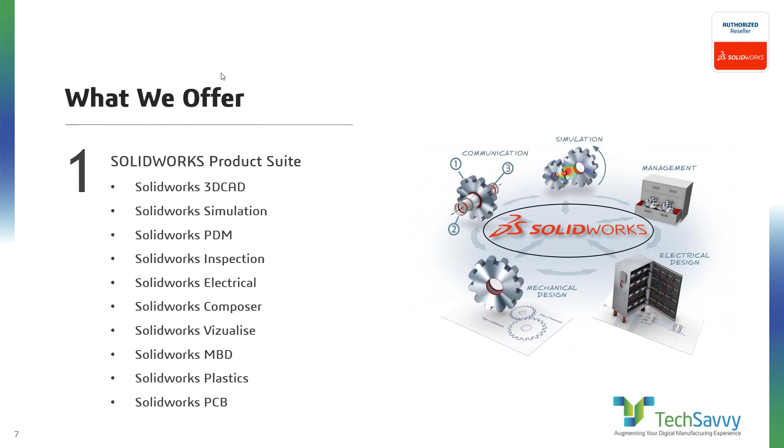Now what we offer. This is the complete product suite we offer. We have solutions from mechanical design to electrical design to electronics design, like SolidWorks PCB layout designer, and we also have solutions in technical documentation, data management, and design validation with our simulation products like structural simulation, flow simulation, and different analysis products.

Apart from this, we also offer design engineering services like 2D to 3D conversion, tool design, reverse engineering, data migration, FEA, CFD simulation services, design automation, etc. Apart from these, we also serve as a training and support provider in North India for SolidWorks products.

Now, our presence. We are present in North India with headquarters in Noida. We also have dedicated offices at different locations like New Delhi, Gurgaon, and Jaipur.

Today I am going to complete a training session on productivity tools part 2, as we are running a free SolidWorks training series called the Mastering series, covering sessions on different modules inside SolidWorks. This productivity tools topic has been planned with 3 sessions, one of which is already done, and the second part I am going to show you today.

This is the whole agenda of productivity tools, and today I am going to cover the agenda for day 2. So today I will cover SolidWorks utilities, toolbox utilities, and the toolbox library.

Let's start with SolidWorks utilities. These are some utility tools with which we can make manual tasks automatic, like model comparison, drawing comparison, drafting standard checking, analysis of thickness variations, dummy part creation for analysis or top-level assembly, etc. With help of these tools we can perform these tasks with just a few clicks within SolidWorks. Even some of the utilities are able to generate reports. These are some features that come under the category of SolidWorks utilities.

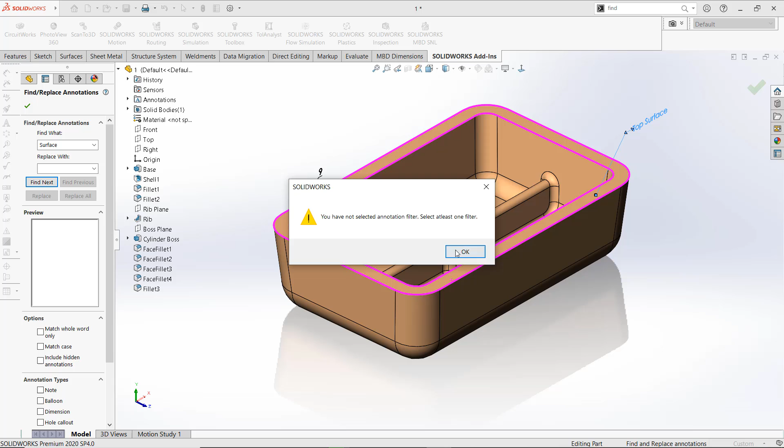Quickly run find and replace annotation. I am going to type surface, and now if I press find next, you'll see annotation filter has not been selected. So this is the time to select the annotation filter. I have selected surface finish, and then find next. Replace this surface spelling with face.

We can replace multiple annotations in a single shot. Now the next is find N and replace with N1.

So these are some tasks you can simply perform with utility tools. The next is find and modify feature. What will find and modify feature do for us? It is used to search and modify features individually or in a group.

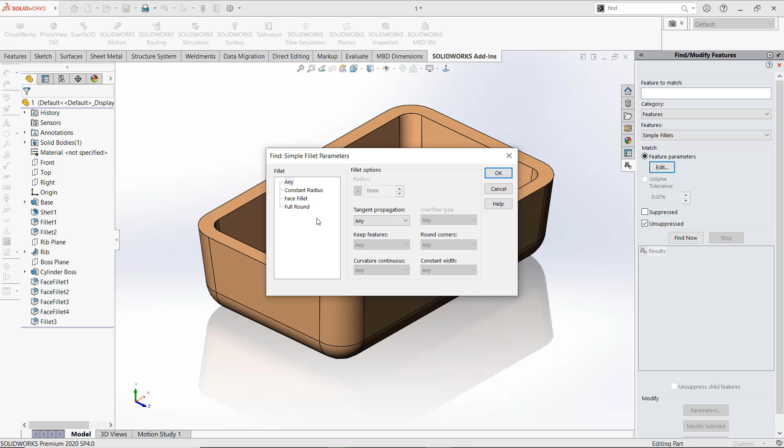Just select a feature in the category and select simple fillet. I can edit parameters to define some range. Find now. I can also define which types of features will be searched, like unsuppressed or suppressed. Now this is the time to observe parameters. This radius value is 6. I am going to change this.

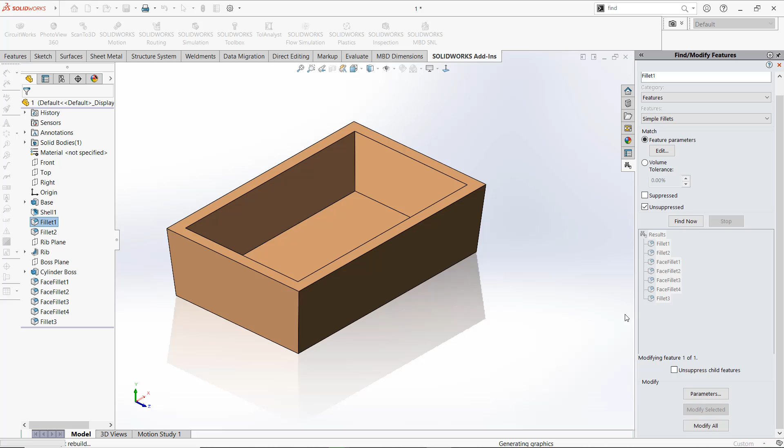I can also select multiple features and change parameters simultaneously for them. Now I am going to change this from 6 to 5, and if I have selected multiple features simultaneously and changed parameters for them, I can use modify all. This time I will proceed with modify selected, and the feature dimension is modified.

The second one is 12 mm. This is the time to change this to 10 mm and modify.

Okay, so this is how find and modify feature will work for us. The next is simplify. Simplify will create a simplified configuration for use in a top level assembly or for analysis purposes. Let's see how.

Select filter as per your requirement, then simplification factor, then find. Now you can see, as per the simplification factor 0.5, 3 fillets has been selected.

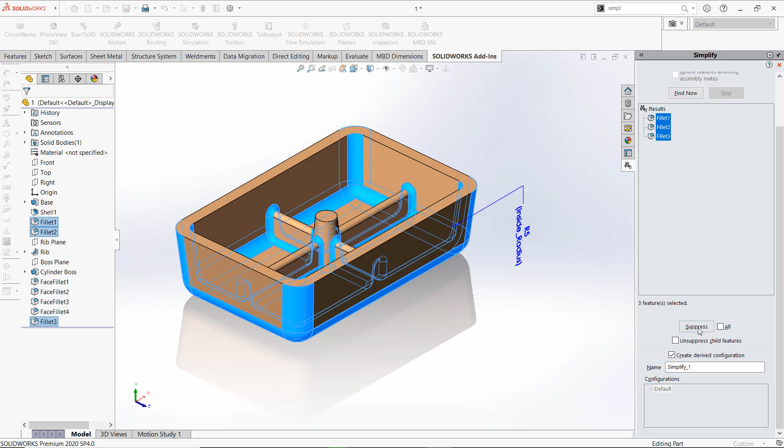Now I am going to suppress these fillets. When I suppress these fillets, simplify command will create a new derived configuration with suppressed state of these 3 fillets. Derived configuration. Now quickly switch to the parent configuration and quickly move to the slide.

The next is power select. What is power select doing? Power select will enable us to select multiple features in a single click. Like we can filter the parameters in different ways, like edge convexity, edge angle, face color, feature type.

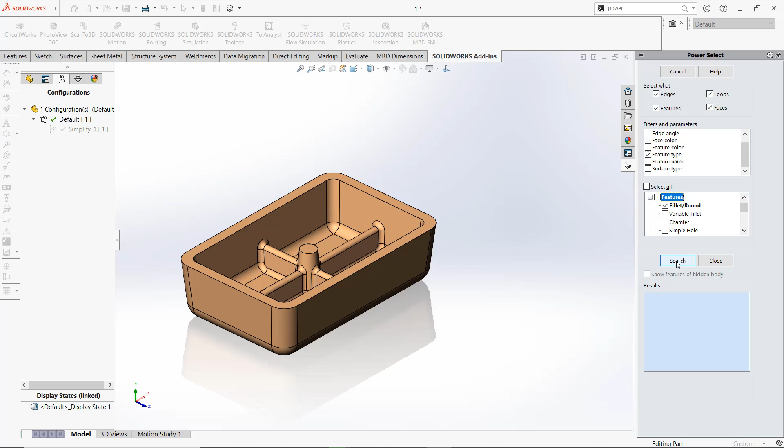I am going to proceed with a very simple filter, feature type, and in feature type I will select fillet, and search. So these are the fillets selected by power select. Now close power select and we can simply suppress all selected features in a single click. So this is how power select will work for us.

Now the next is thickness analysis. What will thickness analysis do for us? Thickness analysis will verify the thickness variation along the whole part against the thickness range or thickness target provided by us.

First, I am proceeding with thin region thickness analysis, and with default values inserted, just click calculate, and this is the time SolidWorks will perform a thickness analysis for me.

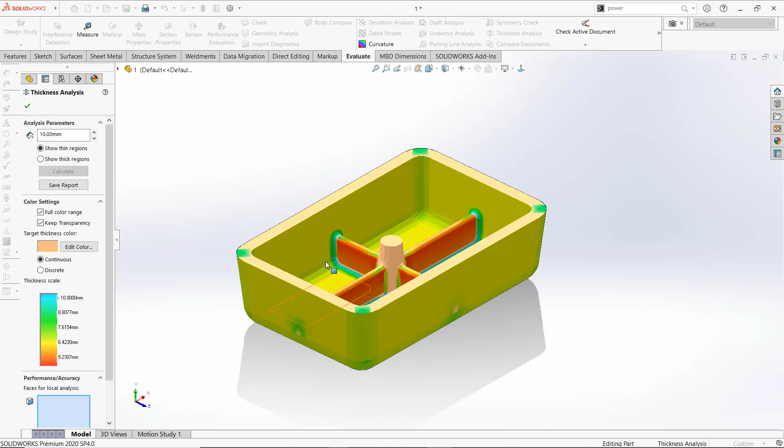Okay, now you can see here, this is the range chart. Change the value to 10, then recalculate. Now you can see the range chart is defined here and the model is color coded as per the range chart.

You can see as this rib is drafted, that's why when you hover your mouse, the thickness is varying at different height. Okay, we can save this report, folder name...

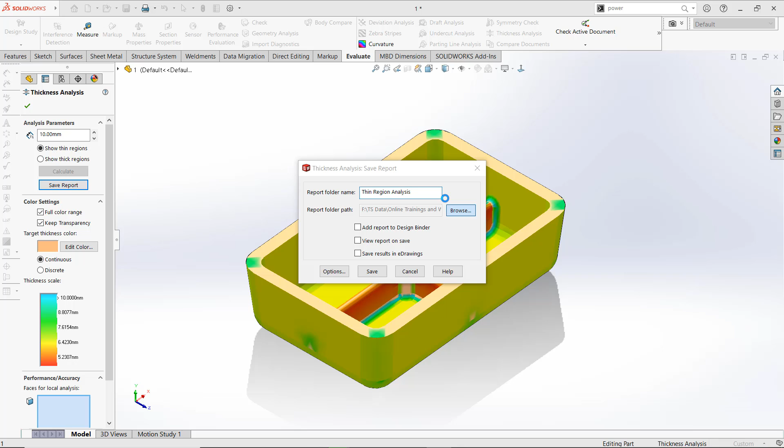Thin region analysis, and I am going to save this to the location. I want to show you that you can set your location as per your suitability. Now save it.

On the same location, we will find the reports. Reports has been created. I can view these reports by double clicking on them, as these are HTML files or HTML pages. Report is opening. Okay, so you will find an interactive report generated by SolidWorks for thickness analysis of thin regions.

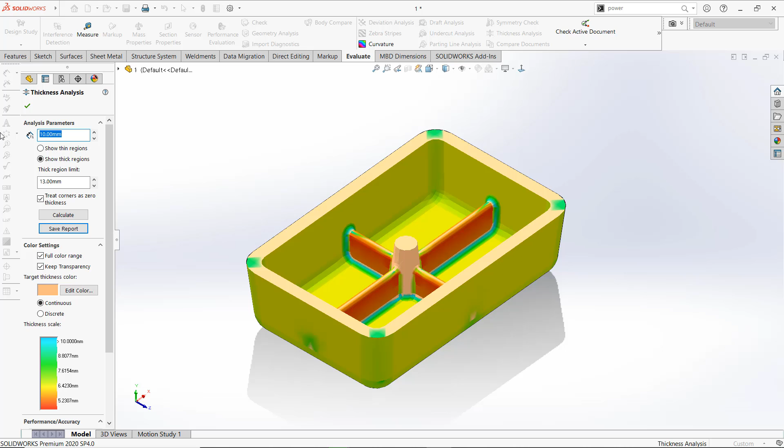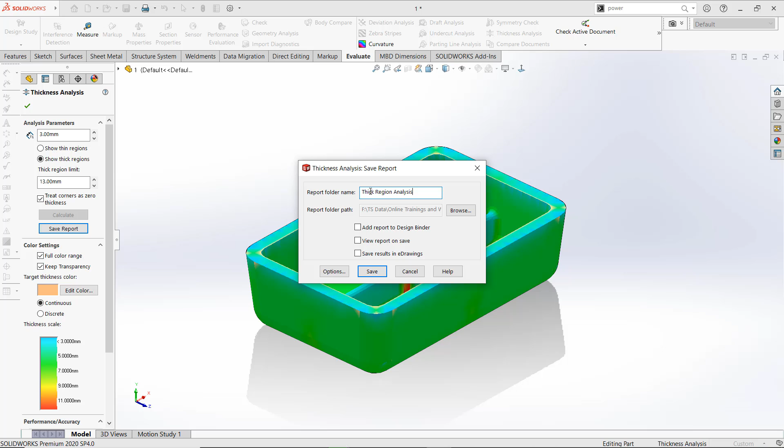Now this is the time to check thick regions. Provide minimum thickness up to some maximum value, and calculate the region that lies under this range. This is the range color chart, and the model is divided into different colors as per the color range chart for thickness. We can also save this report as thick region analysis, and save this.

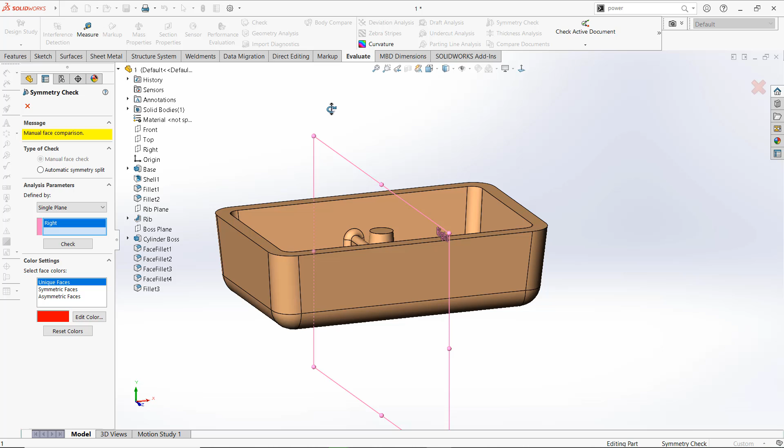Now the next command is symmetry check. Quickly run symmetry check. What will symmetry check do for us? Symmetry check will check the model against a provided planar face or plane for symmetry. Just click on check.

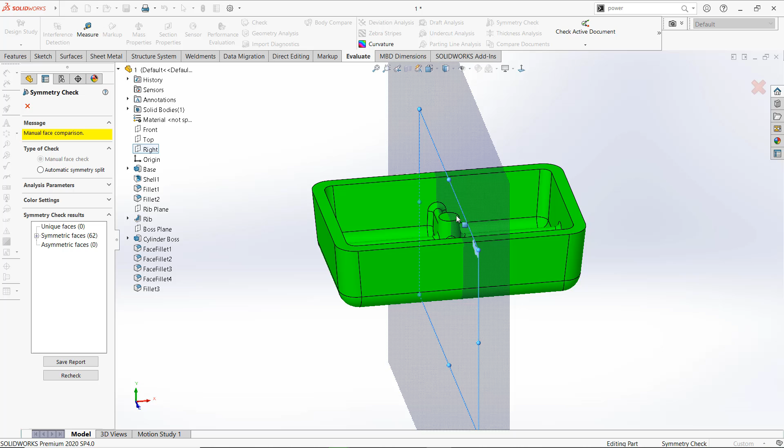Part symmetry check. What are the symmetry check results showing? Part is symmetric about the right plane. Now this is the time to check our part. Part is symmetric about the selected plane. Okay, you will see in the result area there is no unique face, there is no asymmetric face. All faces lie under the symmetric face.

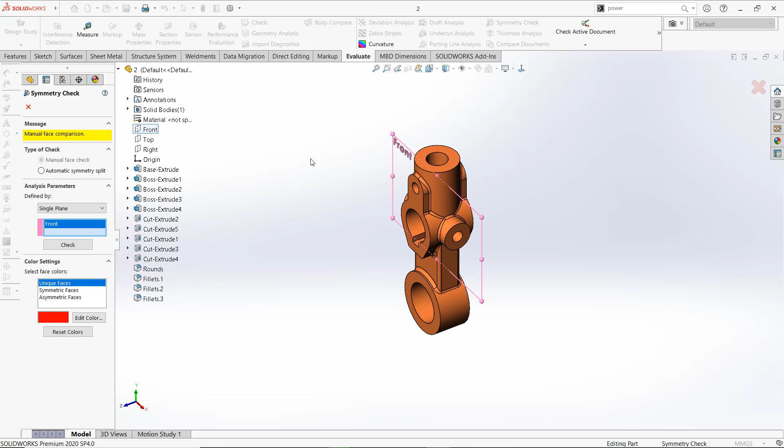Let me show you some different results. I am going to run symmetry check on this model with the front plane. Part is symmetric about the selected plane.

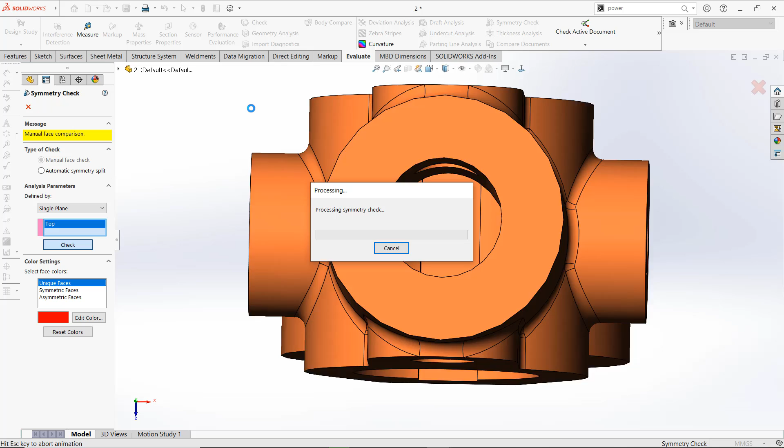Now I am going to select a different plane, like the top plane. And now we will see what results will be calculated by the symmetry check command. You can see there are some unique faces, some different asymmetric faces found in this model with respect to the top plane. That's how the symmetry check command works. Quickly move to the slide.

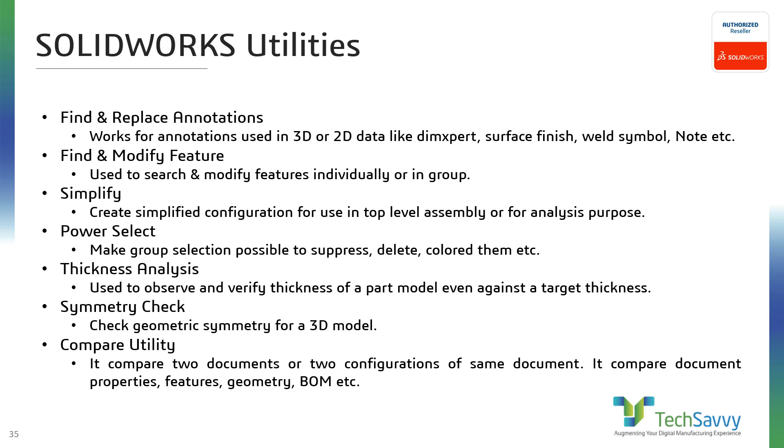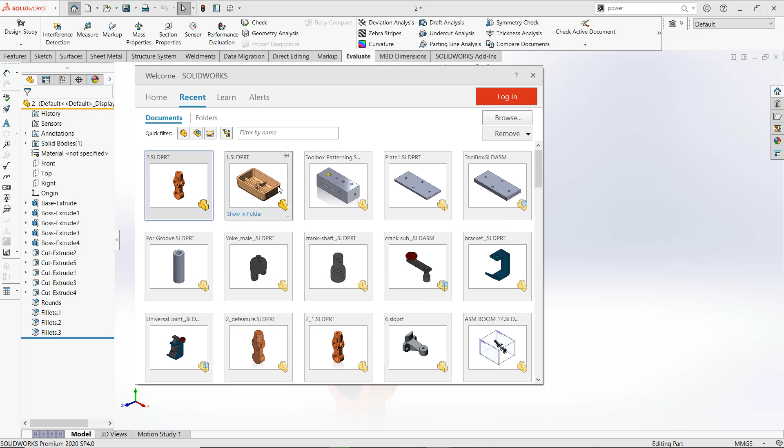Now next is compare utility. Let me show you first. We can run compare utility on similar types of models with some changes. Let me open a different version of this part. Now run compare document for 2 and 2.1. I can select for which parameter I can run compare utility, like document properties, features, geometry.

If I am comparing an assembly, then I can compare bill of material also. Now this is the time to run the comparison.

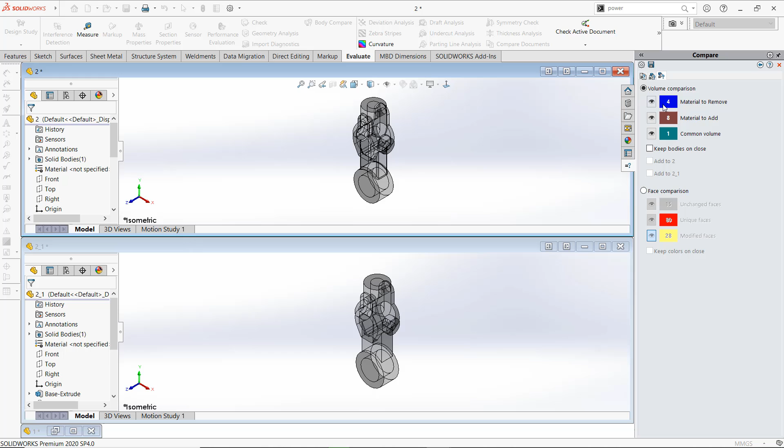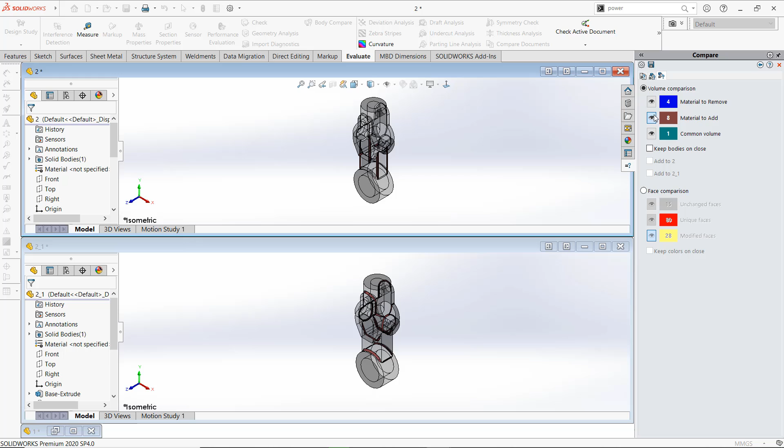These are comparison results for document properties. For features, you can see for geometry, material to remove. This material is to remove this material in this model to make both models identical. Material to add - if you don't proceed with material removal, then you can add materials. And what is the common volume for both models?

So this is the compare document. We can run comparison for both assembly and drawing documents.

Different parameters against which we can check our model, like short edges - we can define range, small faces - we can define range, sliver faces - we can define range. Sliver faces are the faces with very high aspect ratio. Knife edges are the edges where two adjacent faces have an acute angle. Knife vertex are the vertices where two adjacent edges have an acute angle.

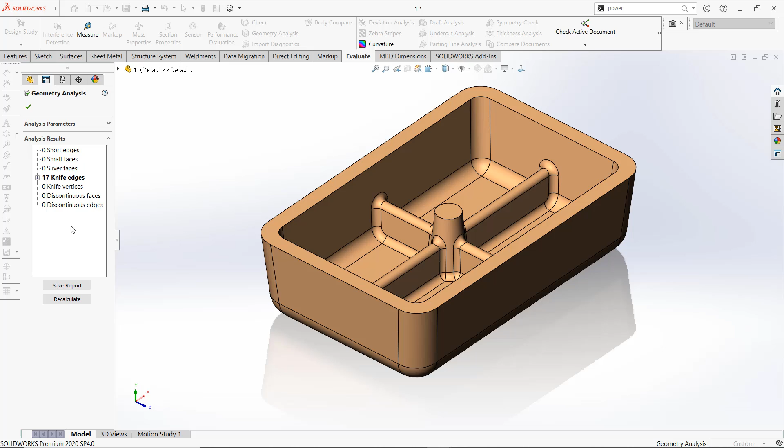We can provide values as per our requirement and calculate. Now this is the result area. Only 17 knife edges have been found. So this is how you can use geometry analysis.

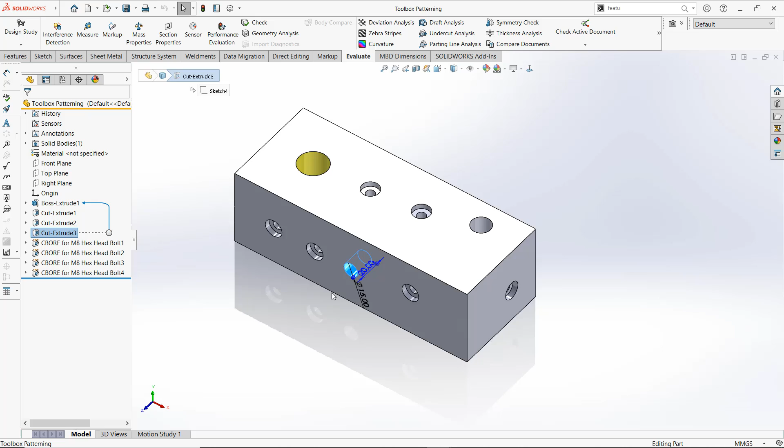Quickly move to slide. The next is feature paint. Let me open some model to show you feature paint. You can see in this model I have created 3 extrude features of different sizes. This cut is 30 by 50. This cut is 20 by 30, and this is 15 dia and 20 dia, 15 by 20. And one of these cuts I have already provided some color.

So now it is time to run feature paint. Select the feature from which you want to copy properties. Make sure feature paint will copy only feature properties, not sketch properties. Select this. Now this is the time to select the feature on which you want to paste the information of the seed feature. Now apply.

As I already informed you, feature paint will not work for sketch dimensions. So you can see the diameter of these holes has not been changed. Only depth, which is part of the feature, and color has been changed.

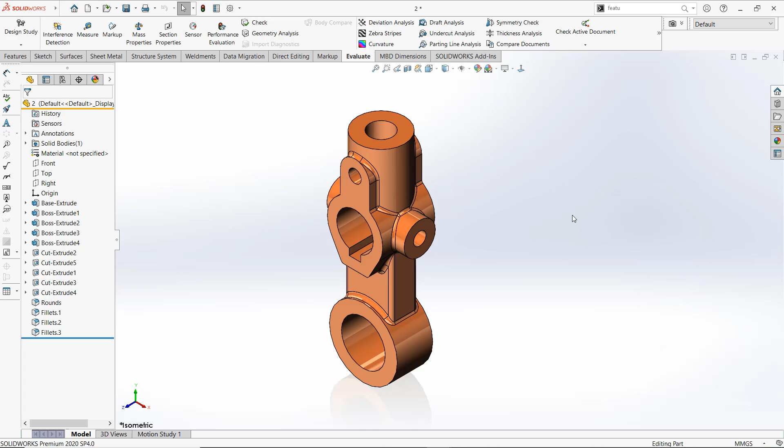Quickly move to slide. The next is design checker. How will design checker work for us? Let me create some drawing from this model. We can even check a 3D model also, but I am going to show you the design checker in a drawing.

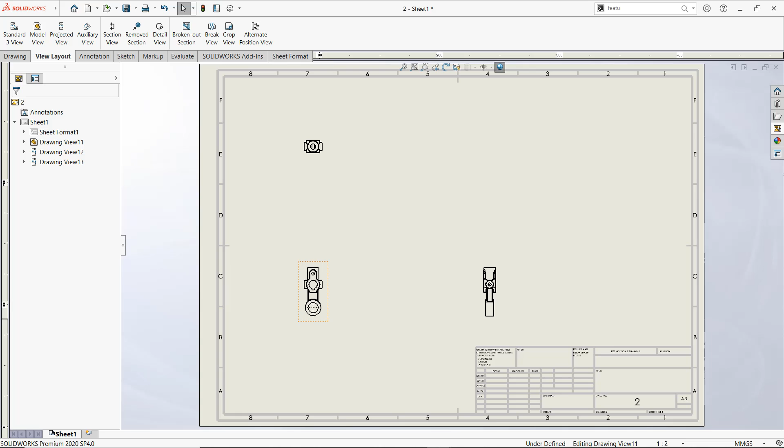Quickly place some standard views, change scale, call dimensions, and make some annotation beautification.

Now, what will design checker do for us? Check active document - these are the options that come under design checker. We can check the active document against standards like ANSI, ISO, BSI, GOST. We can check this document against existing files. If a drafting person created a drawing with the correct standard, then we can use this drawing as a parameter and check all our drawings against this file.

Now I will also brief you on how you can build your check as per your company standard. So I am going to check my document against ANSI. Let me check. Okay, what will design checker do? Design checker will check our documents against document annotation properties like dimensional annotation, note annotation, font, arrow size, dimension placement method - different items which come under the drafting standard.

So these are some differences found as per ANSI standard. We can correct the current item. We can also autocorrect all items. Then correct selected - the next one is arrow style, actual value, preferred value, correct selected. Note font check. I can also press autocorrect all, and you will find that font and different entities have been modified. So this is how design checker will work for us.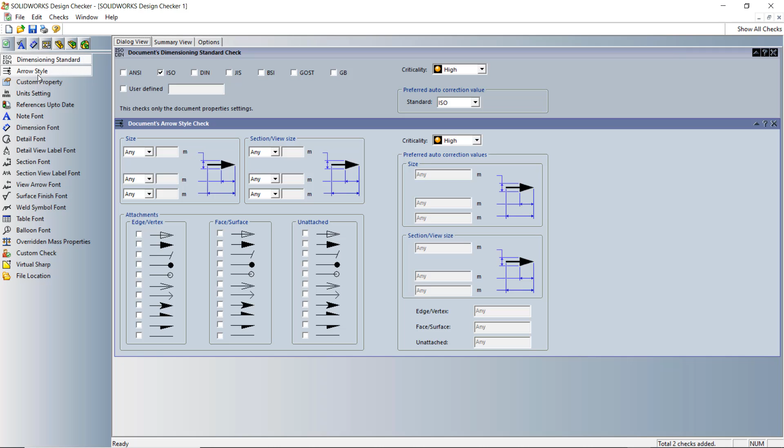Now the time is to show you how you can build your checklist. Select a new document and select items for your checklist, like dimension standard. Define your dimension standard - I am going with ISO. The next is arrow style. The next is unit setting. The next is note font. So I am building my checklist. You can see here - this is how you can build your checklist and save it as a SOLIDWORKS standard, or .swstd file.

Basically, I have checked against ISO, which is also a swstd file. This is how you can build your checks.

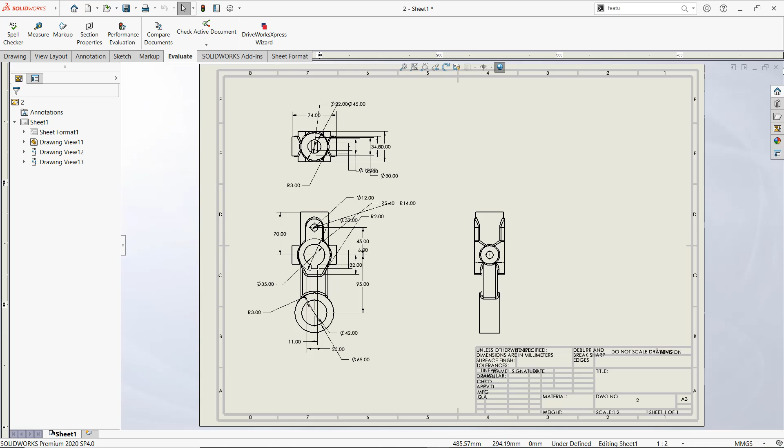Now quickly move to slide. The next is defeature. Okay, what will defeature do for us? Defeature will help us create a simple model for third-party content publishing or top-level assembly utilization. Let me show you how.

Run the defeature command. Select the feature you want to keep. You can select items on a different basis. Now the next is to select the item you want to remove. I can also create a defeatured model from assembly features.

I can save this as a new document. I can link this defeatured model with the parent so that when I apply some changes, the defeatured model will be updated. I can publish my model in third-party content central or Dassault 3D content central. I can store settings for future use.

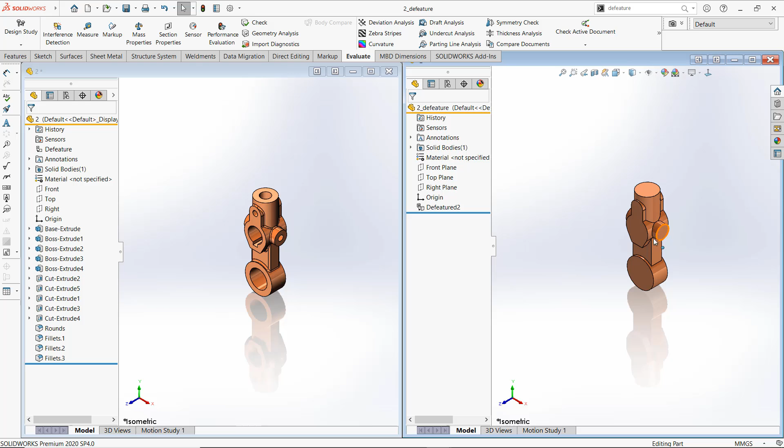You can see the feature is added in my history. Whenever I edit this feature and apply some changes, those changes will be automatically applied to this defeatured feature, because I have made this defeatured model linked with the parent one.

The next topic is assembly envelope. Let me show you how we can use assembly envelope.

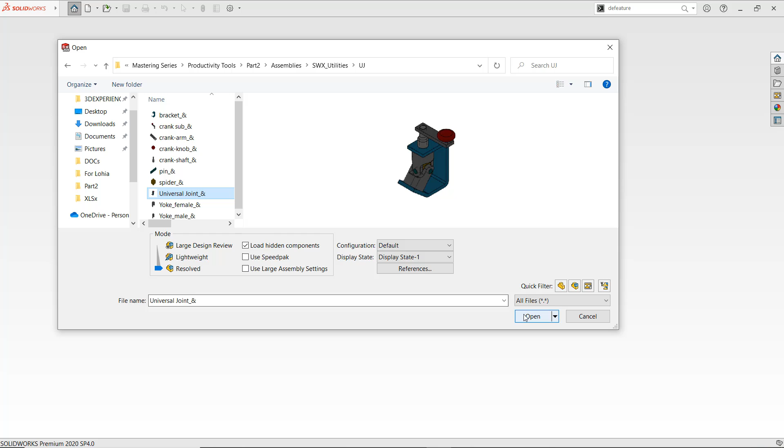Let's say I am going to create some assembly. This assembly is my target work, and I have created some parts and sub-assemblies for it, like this crank sub-assembly, this bracket, and this male yoke. Now what I want to check is the alignment or other things without creating an actual assembly.

For that, what will I do? I am going to open this part and create a temporary assembly document. Now this is the time to evaluate mass properties: 56.36. Now I will call some items like the crank assembly I have created.

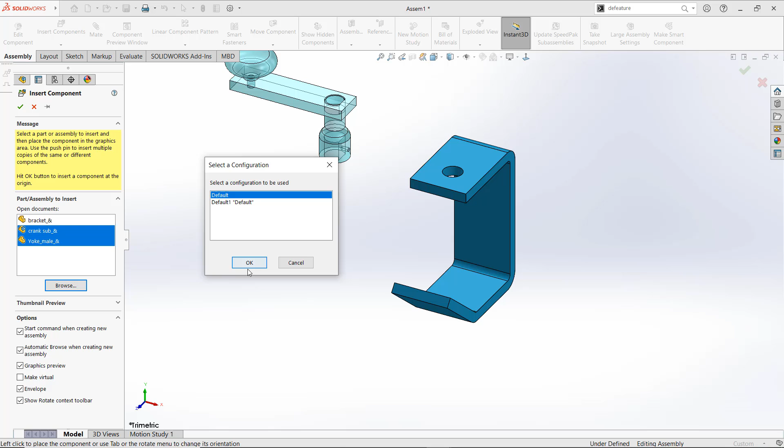And the yoke male I have created, and I will call these items as an envelope. So you can see envelope items are called in the assembly area as a virtual item. There is no contribution of these items in your mass property, even in bill of material also.

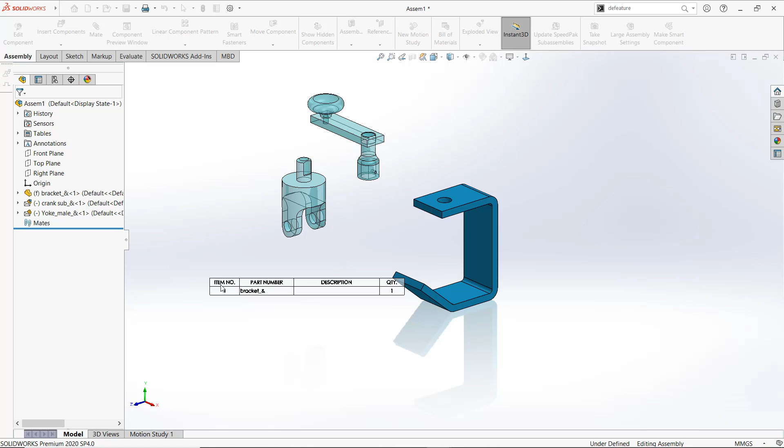But we can apply different references like mate reference or other references on these parts as an actual part. So this is how we can use a part as a virtual part inside the assembly to check mechanism without creating an actual assembly.

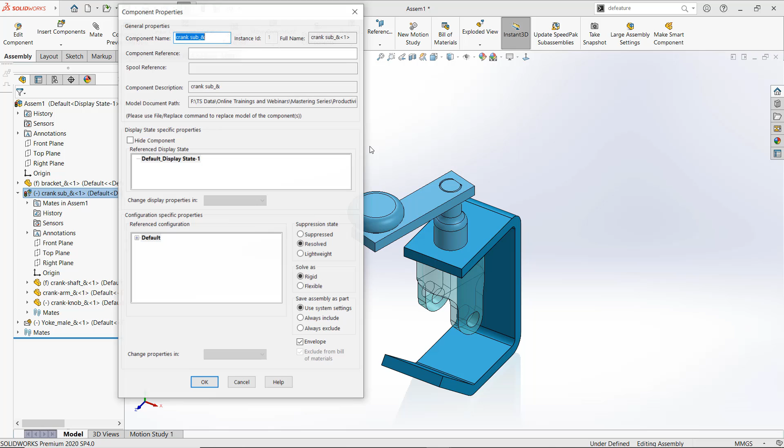Even I can change this state directly by clicking on properties and checking envelope. This is how the envelope command works for us. You can use assembly envelope more effectively from 2020 onward.

The next is report manager. What is report manager? Report manager basically manages all your reports created from different SolidWorks tools.

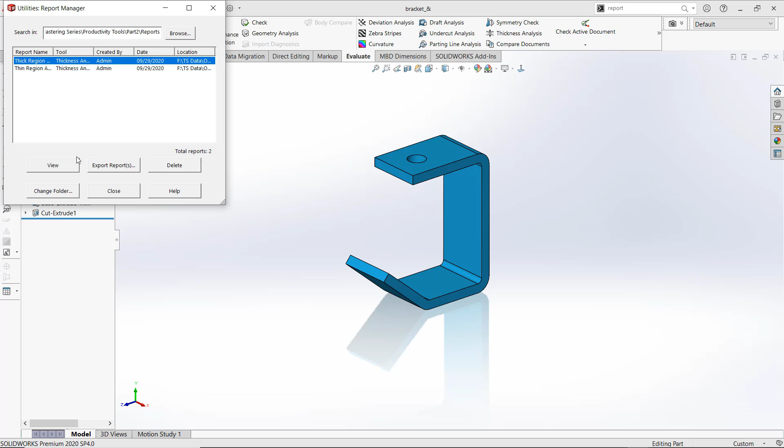Just provide a location. I am going to paste this location and press enter. Both reports I have created are showing here. Just click on view to view any of the reports.

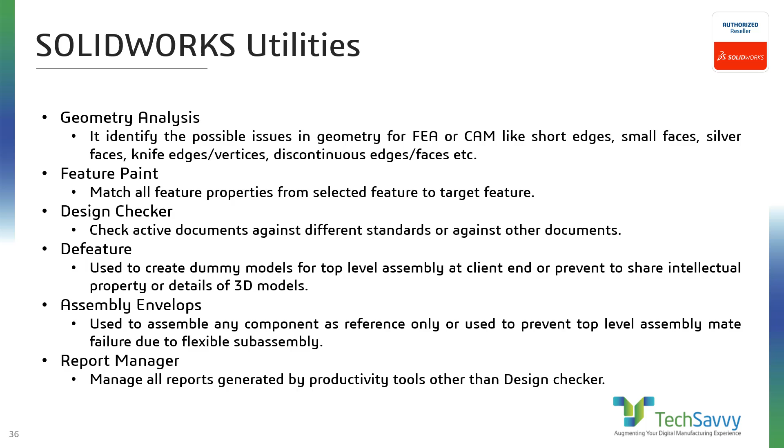Now quickly move to our slide. The next is toolbox utilities. So what are toolbox utilities?

These are some utility tools with the help of which we can make standard items and features like structural bar, groove, cams, etc. directly, and also calculate stress and deflection of standard beams in planar or 2D applications. Tools that come under this category are structural steel tools, cams, grooves, beam calculator, and bearing calculator.

Let me show you how we can use this. Quickly close this and open a new part, as at least one part document is required to run it. Go in add-ins and add SolidWorks toolbox. When you add SolidWorks toolbox, utilities will automatically be added.

So I am going to start with structural steel. These are some standards provided in structural steel, like ANSI, BSI, CISC, DIN, ISO, JIS. Just click on type of beam.

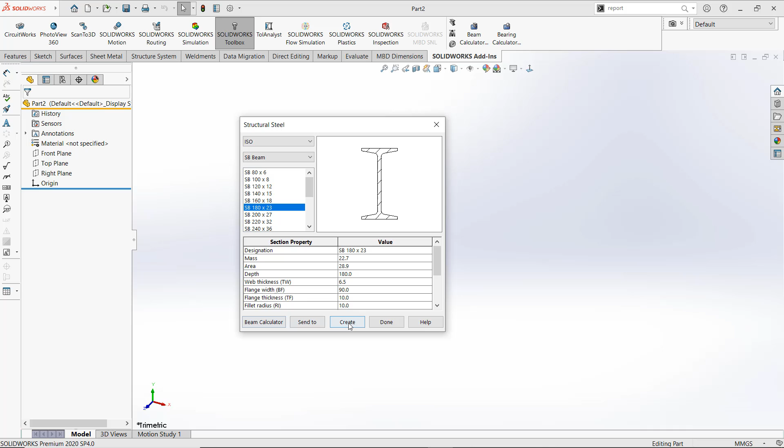And select size and click create. So SolidWorks will create the same standard sketch for the same cross section. You can make this sketch fully defined by providing dimensions against the origin by editing this sketch.

Now the second thing, I can switch to the beam calculator directly from this, and whichever cross section I have selected, the beam calculator will calculate the parameters for the same cross section. As you can see, the moment of inertia for different cross sections is different.

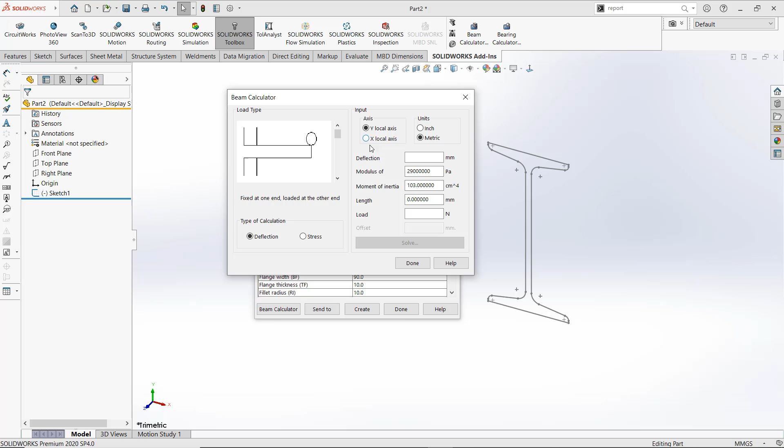So we can use both units, like inch and metric. Now put some length, say 500 mm, put some load value like 150 Newton, and it will provide deflection. For this case, there are some standard cases defined in the beam calculator.

These are some standard cases for which you can make direct calculations. For your stress, just provide length and load, and solve this. This is the stress value. This is how you can use the beam calculator and structural steel.

Now the second one is bearing calculator. Just select bearing, just select standard, type of bearing, bearing size.

Now this is the time to make some different calculations, like provide number of balls, provide ball diameter, and solve the capacity. And for this capacity, solve the life for different values of load. This is the life in revolutions, this is the life in hours.

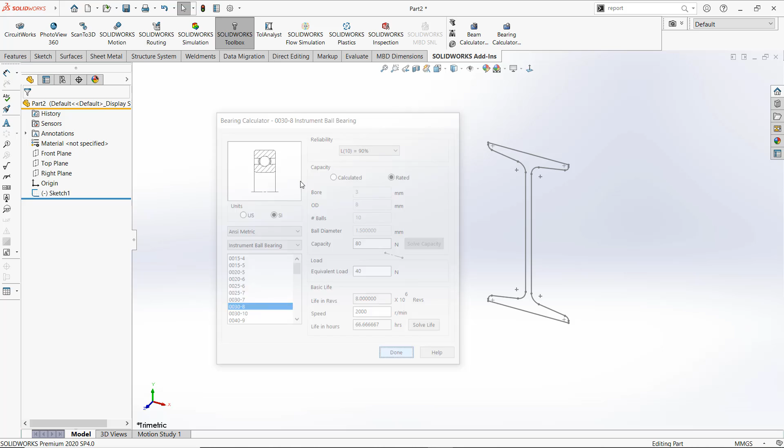Now solve life for different load values. This is how you can calculate bearing life.

Now the next item is to run some groove. Let me open a different part. I am going to show you groove.

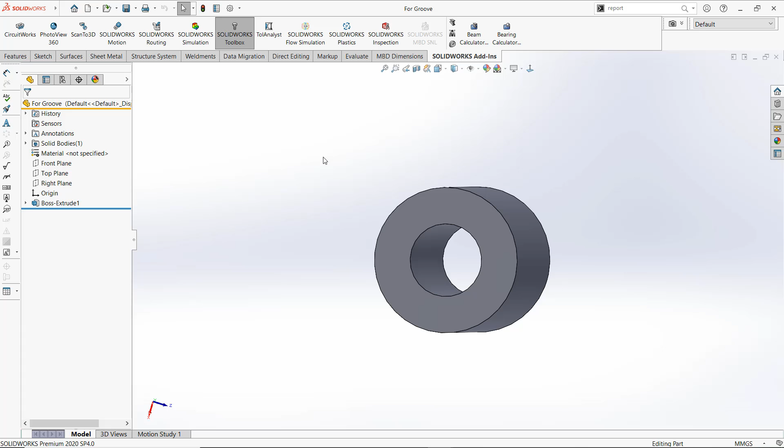Two types of groove you can create inside SolidWorks: one is O-ring groove, the other is retaining ring groove. Let me start with O-ring groove. Just select standard, select type of groove, select size, and create.

You need to select a reference face to create the groove, and the groove will be automatically created by SolidWorks. The sketch is underdefined. Just define this sketch as per your requirement. First, make this sketch dimensioned.

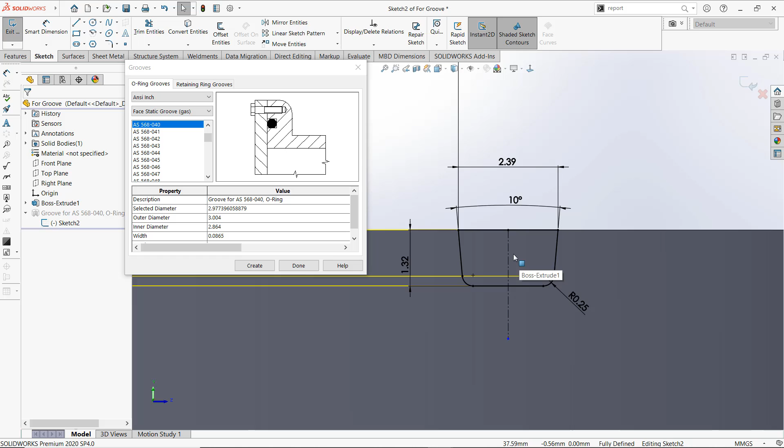Okay, sketch is defined, and now you can change the groove position and dimension as per your requirement.

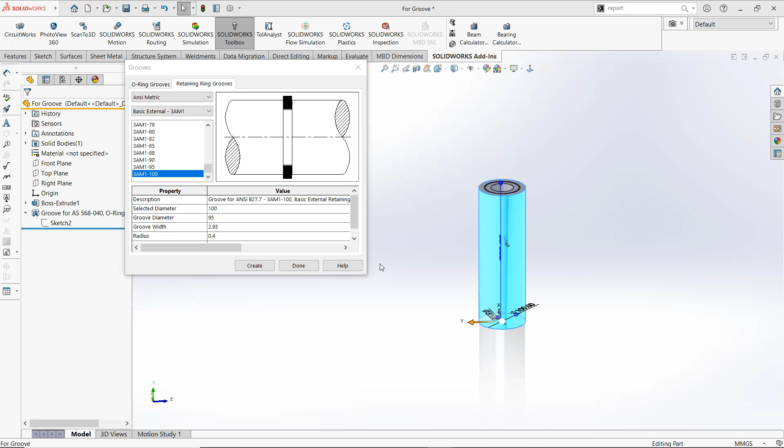Similarly, I can apply retaining ring groove: standards, types, sizes, select reference, then apply groove.

Here you will find the sketch is underdefined. You can define this sketch manually as we have already done before.

Now the next is, inside SolidWorks you can create two types of cams: one is circular cam, one is linear cam. Let me show you how, and you can use these cams in your assembly.

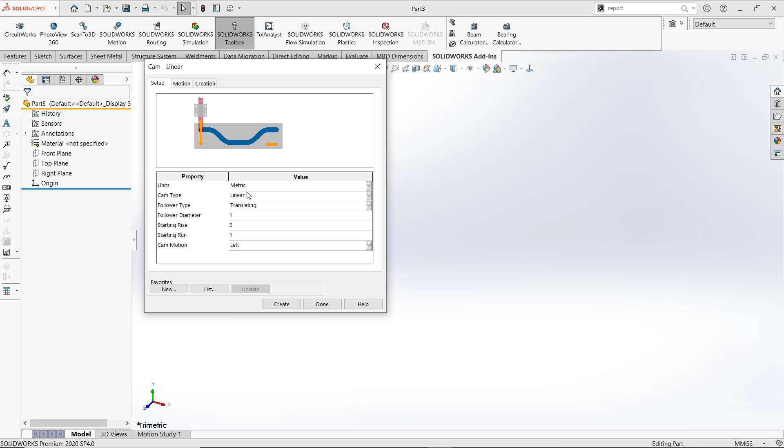Here I am going to make a simple cam for example. I will start with circular, and I can select different types of followers. I will start with translating. Follower diameter will be 1 as it is, starting radius I will put here 3, starting angle will be 0, and the rotation direction will be clockwise.

Now the next step is to provide some motion. So first motion I will start with a dwell of 90 degrees. The second motion I will provide constant acceleration with ending radius 10 mm and motion range of 120 degrees.

The next motion I will provide a cycloidal with ending radius of 5 and the motion range of 60 degrees.

The next motion I will provide modified sine, ending radius of 6.5 mm and the motion range of 45 degrees.

Still 45 degrees of motion remaining, so I will add one more motion, let's say harmonic, with 6 mm ending radius and 45 degree range of motion.

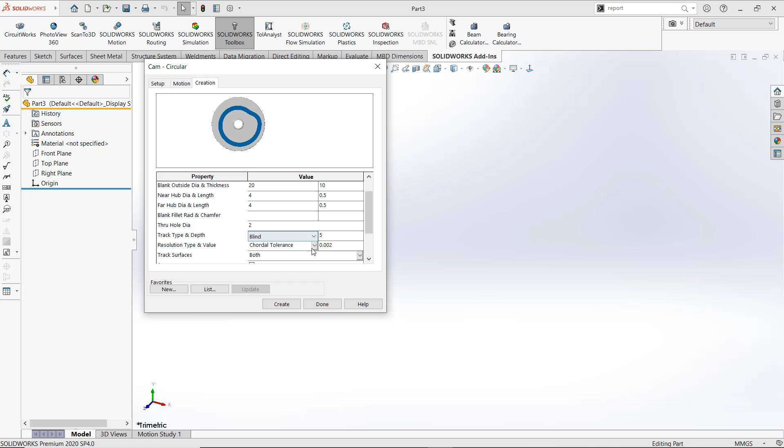Now through hole diameter will be 2, and track type and depth will be blind with 5 mm as it is, and resolution type will be, let's say, chordal tolerance with the same tolerance as it is, 0.002, and track surface is inner rather than both sides. Now let's see what it will create for us.

Okay, I have to change the starting radius, as I have provided a large radius range for different motion.

Now let's see what the tool will create for us. Okay, cam is created.

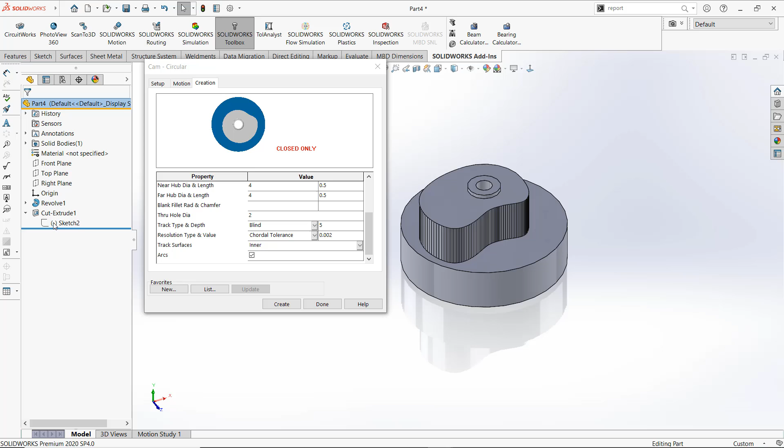Now this cam path is divided into facets. For using in assembly, what you have to do is just make this sketch smooth with the help of fit spline.

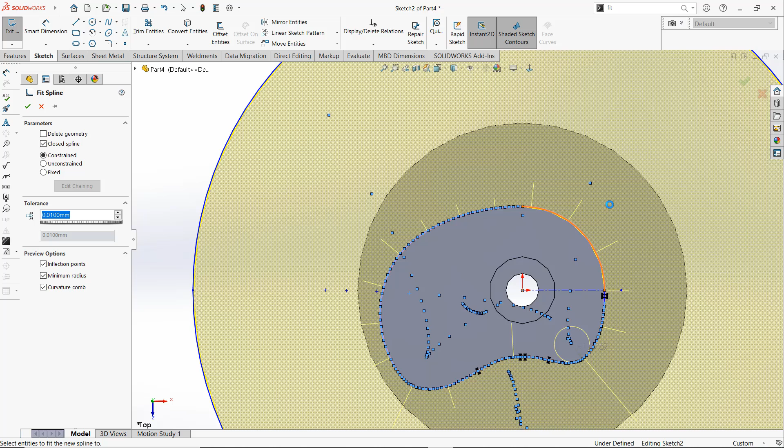Fit spline is making our sketch smooth for cam motion. Just set your tolerance and click OK.

Now a smooth path is ready to select as a cam path. I can also use angular increment with some values and try to create a cam. Let's see what will be the result.

So you can see the face is still divided into facets. We can make this smooth, not a big deal. Near hub diameter, near hub depth.

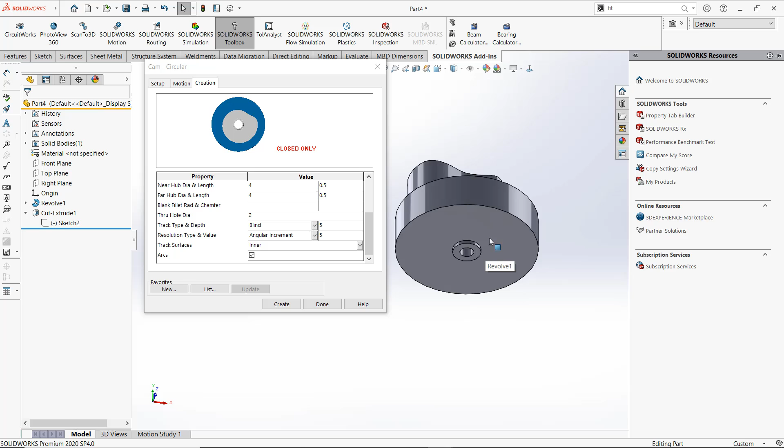Okay. Now the next task is to create a linear cam. I am going to show how to create a linear cam.

Just select the linear cam. Follower, I will proceed with translating as it is. Unit, I will proceed with metric as it is; you can change it to inch also. Follower diameter, I will proceed with 1.

Starting rise, I will proceed with 2 as it is, and starting run 1 as it is. And cam motion is to the left.

Now motion, I am going to add some motion. I will start with a dwell of 2 mm. Then I will add a motion like cycloidal with 8 mm rise.

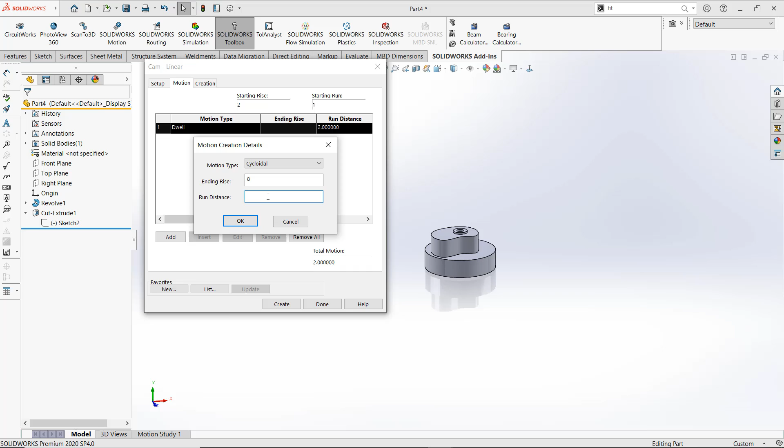And what is the run distance? Let's say 7 mm.

The next is also dwell with 4 mm. The next I will provide a motion along a constant acceleration curve with 6 mm rise and 3 mm distance.

Next is dwell of 4 mm. Next is modified trapezoidal with, let's say, 4 mm ending rise and 4 by 4. The next will be also a modified trapezoidal of 4 by 4.

Now the creation: provide blank thickness 5, provide blank width 10, provide blank length 30. As you can see, the total motion distance is 28.

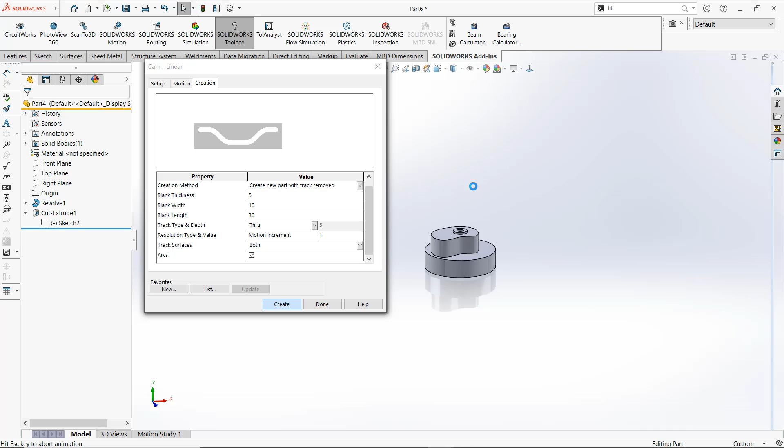Now let's see what will be created with these parameters. This is the cam we have created.

You can make this cam path smooth for using in assembly. So this is how you can use cams.

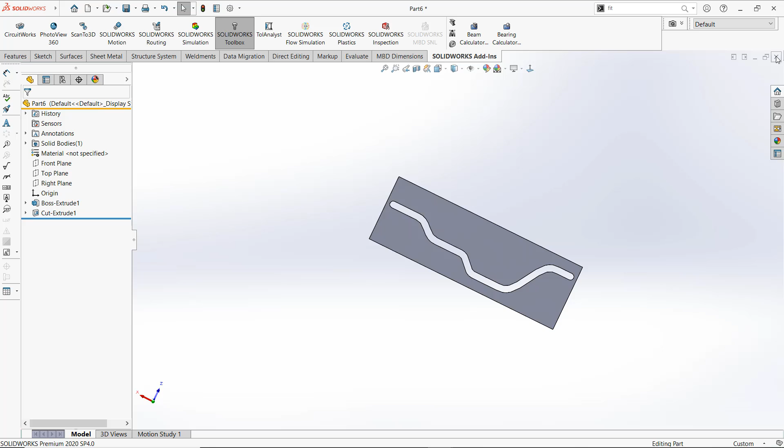The next is toolbox library. Let me start with some assembly document so that I can show you how you can use toolbox, how you can edit your toolbox, and how you can customize your library as per your requirement.

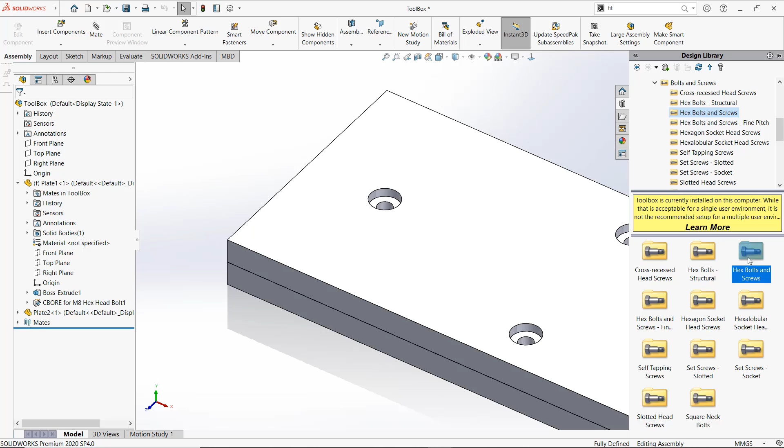I can provide some fasteners. Hex bolt grade C ISO 4016. This is the time to add some fasteners here. ISO hex bolt grade C 4016. Just place a fastener here.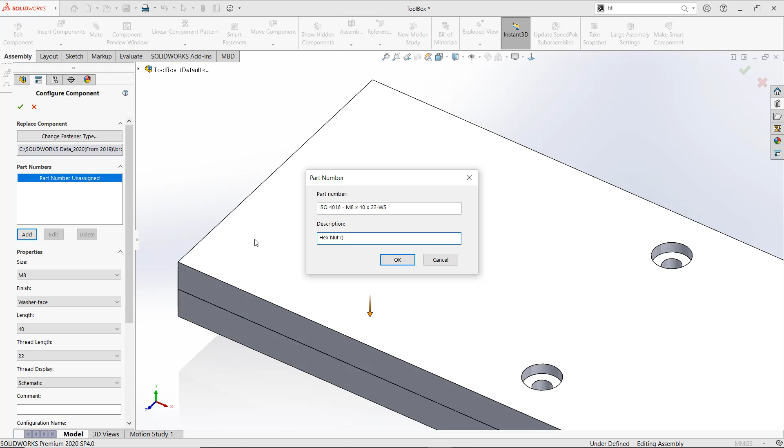Description and part number is already provided here, or you can provide your own description and part number also. Like I am going to provide it: hex, nut, size or number as per your company standard. Just control length.

Put thread display as cosmetic, as schematic will consume more system capacity. I can modify this range. I will show you in the customization. Now click OK.

This is how you add the toolbox. Now how do you edit the toolbox? Just right click on toolbox and edit toolbox component.

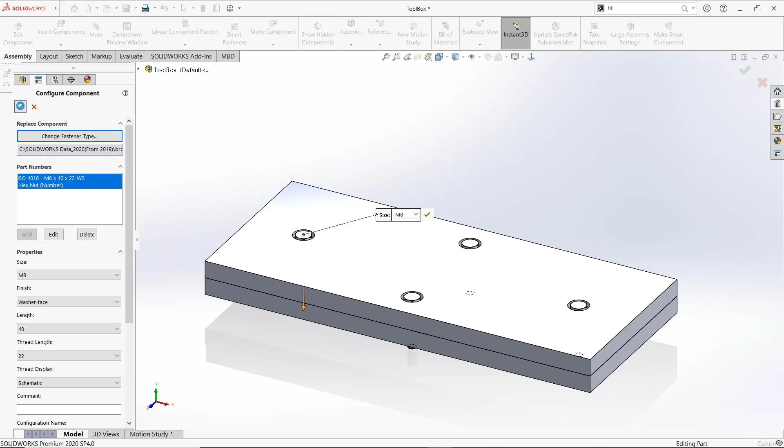Generate a BOM. You will find the part number, description, or other information is added here. This is how you can control the bill of material information of the fastener.

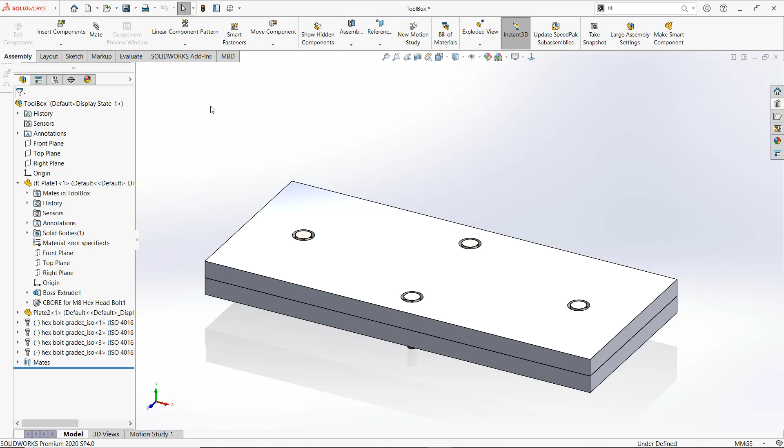Now let me create a top level assembly by using this as a sub assembly, to show you that in case of sub assembly you will not be able to edit your toolbox, for which you need to open this assembly in its own window and then you will be able to edit the toolbox.

Now what is the next? The next is patterning of toolbox components. Let me show you how you can pattern your toolbox. Just create an assembly document from this for example purpose.

Provide some fastener here. And now this is the time to check that you have provided these 3 holes in single command. So you can pattern this fastener in all 3 holes.

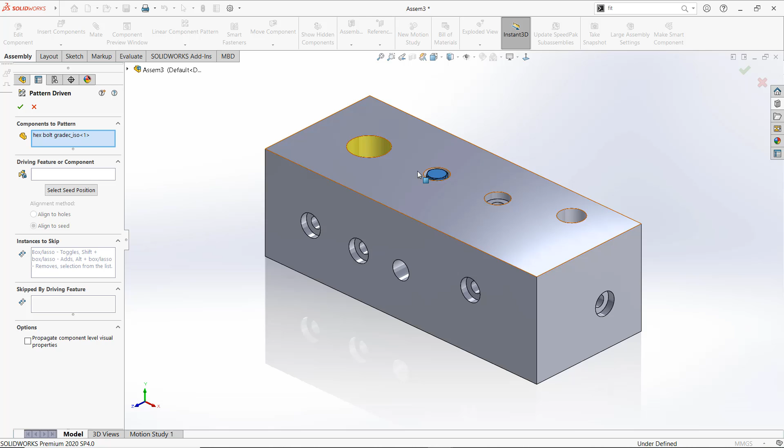Just select a feature to be patterned. Just select seed position. You can see preview appear here. You can decide whether your instances will follow the alignment of seed or alignment of hole. Now generate bill of material. Okay, part number, description. This is how you can pattern your toolbox.

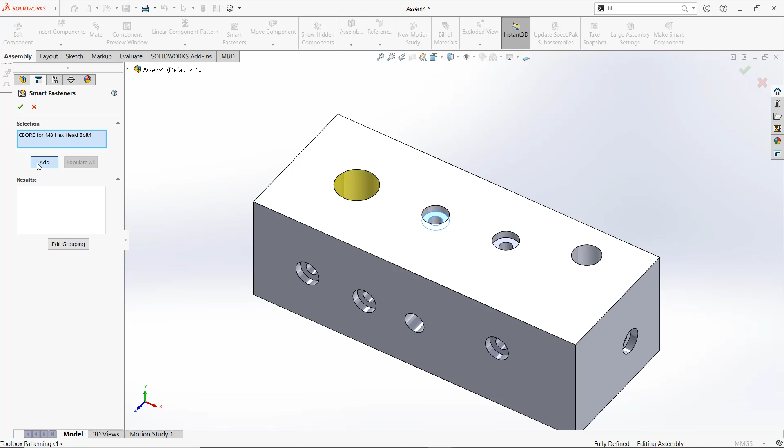The next one is smart fastener. Let me show you smart fastener. Just by selecting hole, we can provide fasteners from our toolbox library directly. So holes provided in one command will automatically populate with fasteners of same size in single click.

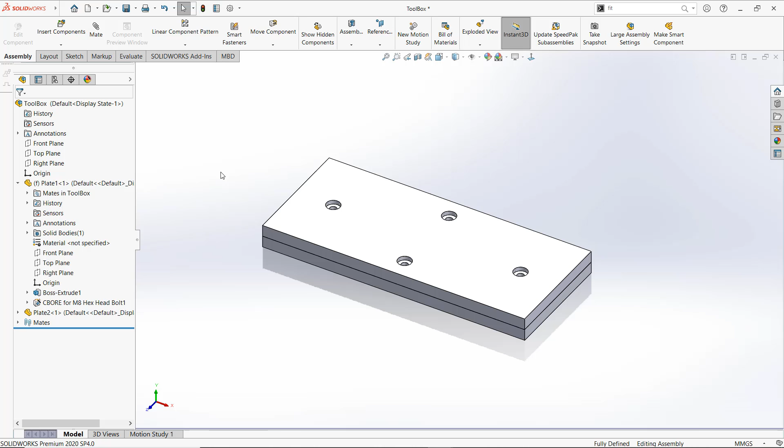We can provide some stacks here, as you can only provide top stack or top washer here. So only top stack command appears. For the same type of item, here you will find both type of stacks, a top stack and bottom stack.

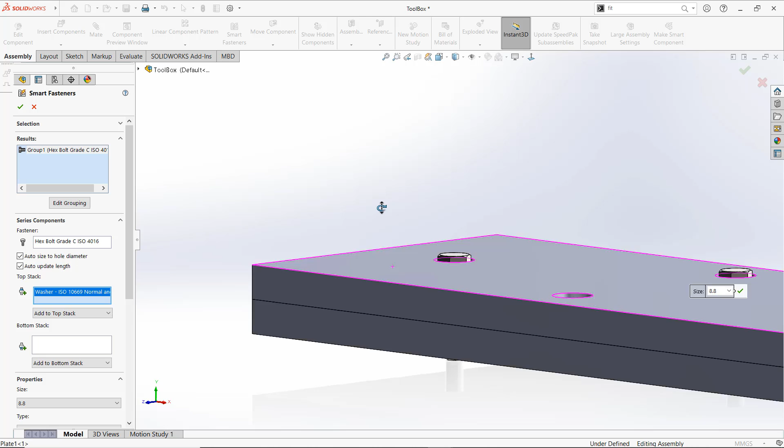Just add some top stack like this, and add some bottom stack like this. Okay, this is how you can use smart fastener command. So all toolbox components will come under the smart fastener folder.

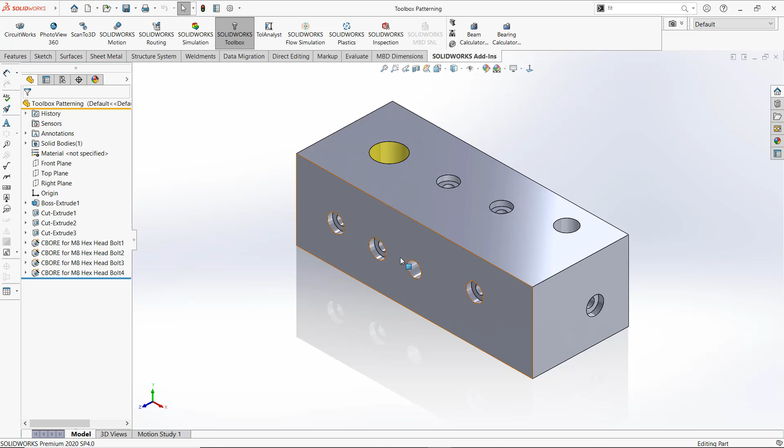Now what is the next? The next is configuring your existing toolbox library. Okay, pretty interesting topic. By clicking configure toolbox, you will be able to access your toolbox customization. Let me show you how.

Here you can control different parameters, like the same fastener, same grade as I have used. I can add part number and description before starting to use, or even I can add a different range of length for the very same M8 fastener. You can see this is the length range provided here with thread length.

I can increase this length by clicking add, or in this case of filling part number and description, what I can do is simply export this data and quickly open this data.

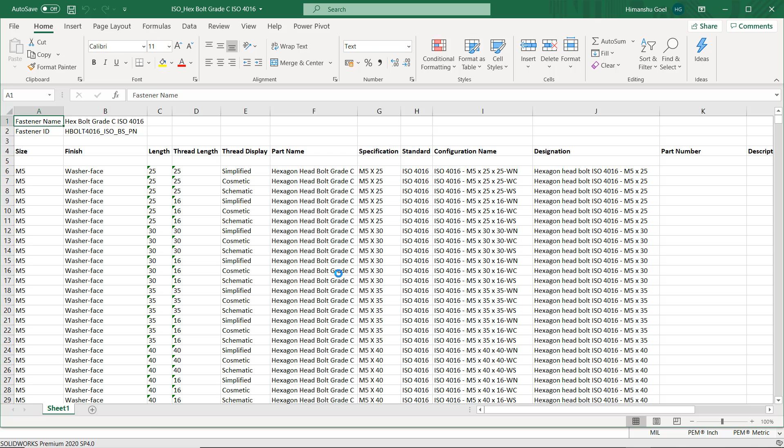Now put some part numbers here like A, B, C, D, 1, 2, 3, 4, 5. Then populate this with different values. Now this is the time to provide some description like A, B, C, D, E, F, G, H. Copy this. K, L, M, N, O, P. Copy this. Save this.

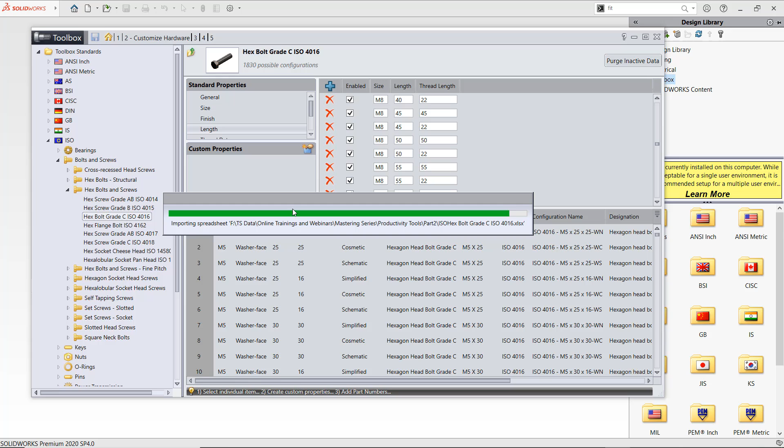And import this. You will find all information automatically filled here. You can add comments also. Just save it and enjoy it.

The next is creating custom standards. Okay, let me show you how you can create some custom standards. You can add a folder inside the existing one or inside the master folder.

Like I am going to add a folder named ABCD, and inside this you can add folder or file. Even inside this you can add a new folder or file directly. You can add your configured part here.

From here you can control different properties and save this. By saving, what you will find is your standard inside this with your fastener created. That's how you can customize your SolidWorks toolbox library.